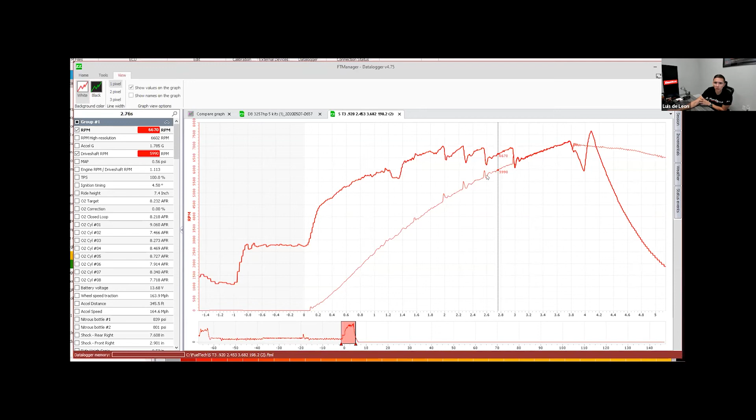I see it. Okay, so this is the data logger side of the system. As many people can see, the background is black. I'm going to show how to change it to white, because the other day a lot of people asked me. It's pretty simple, depends on how you want to do it - white or black. I'm going to keep it in black, I think the contrast is a little bit better. This is actually a run of my car back in the day when we were doing Radial vs The World.

If you see, this vehicle does not look much like a nitrous car. The motor goes uphill and you barely can see the kits coming in, but look how interesting - the car does a dive on the motor right in the middle. And you can look at the timing - it went down to -10 because it was pulling a wheelie. Since it's a radial car, there was no ride height on the car, and you can see the front end of the vehicle was going uphill, steady going uphill. The unit sensed it and took power away to bring the nose back down, so the driver didn't have to feather the throttle.

So number one, it takes the chance of flipping the car backwards and crashing pretty low. Number two, the driver is never going to be as quick as electronics. So instead of the driver trying to pedal the car, the driver, in this case me, could stay at 100% TPS throughout the run, but the ECU manipulated the power so the front end could go back down and make the pass. On this particular run, the car went 0.920 to the 60 foot, 245 to the 330, and 368 at 198 to the eighth mile.

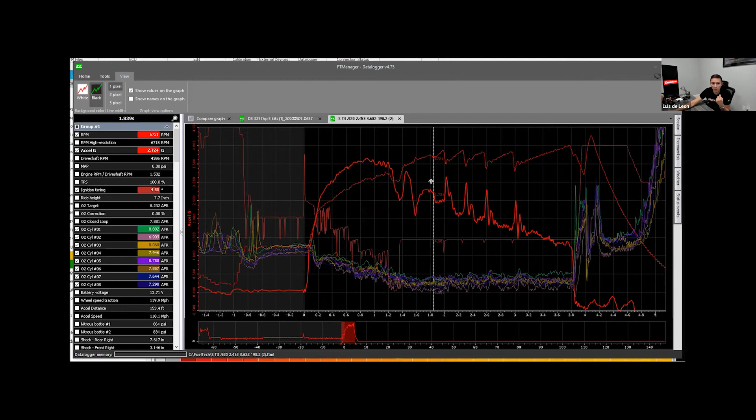Also, it has individual O2 sensors, as you can see, so every single cylinder has a different O2 reading. It has a built-in G meter where you can see the G meter of the car. You can see where it shattered the tire a little, and then it slowed down during the wheelie because it stopped the tire to come back, and then it went back at it. It's a 5-speed transmission, and the transmission is manipulated by the ECU. So all channels are recorded - everything that's in and off is recorded. This is the nitrous kits kicking in - you can see where boom, boom, boom, boom, they go in.

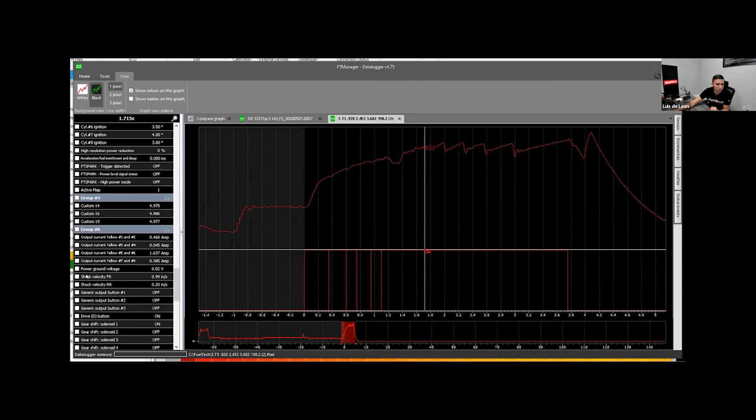Going back to the transmission, the ECU shows when it does the shifting. So there's no guessing anymore. Did my electronics try to shift? You can see the output going on and off, trying to shift. That thing will tell exactly what is going on.

And some of the outputs even measure current. You can make sure that when you trigger the output, the ECU sees the current draw, just like a power distribution module. Sometimes we talk about a PDM, but some of the stuff on the car, you actually wouldn't need a specific PDM because the ECU itself can provide enough juice for that.

So the transmission solenoids are connected straight to the ECU, and the ECU can check, as you can see right here. Once I shift it, you see the current change. So I can see that, yeah, my solenoid is connected to my transmission, is doing what the ECU is telling it to. This helps you tremendously when trying to diagnose a problem if it may happen. The problem happens, it will tell you. Something happened right here. You see there's no current on the solenoid for number 3 gear shifting.

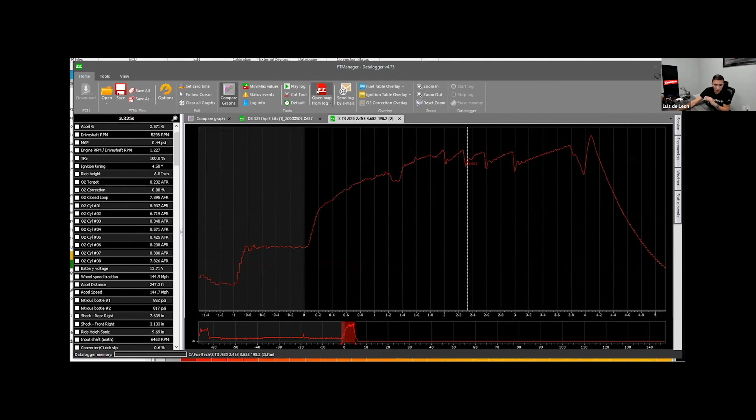Another really cool feature in the system, if you have a data log, the tune is attached to the log. So you can block it if you want, but it's a native feature they use. So okay, I made this run, 368 on radials. This is my drive shaft plot. I can straight see it was a little bit lazy here, a little bit fast there.

That's why you wheelie, so it was too fast here, a little bit slow here. That's fine, let me see what I had on the tune-up. So you can click on this button. And I think I don't have you guys... let me show. So I'm gonna do a new share, and I'm gonna share my FT Manager now.

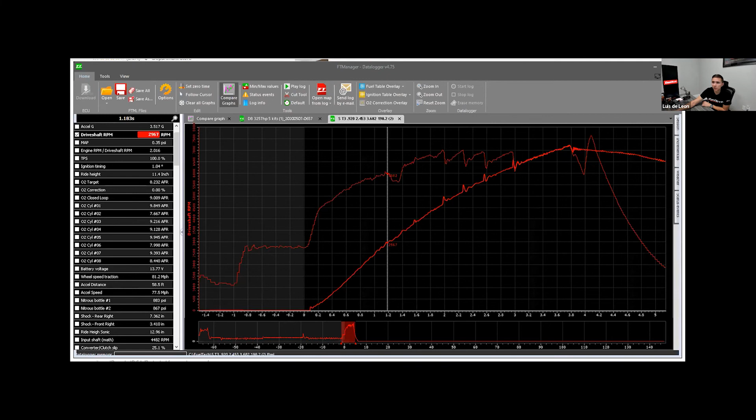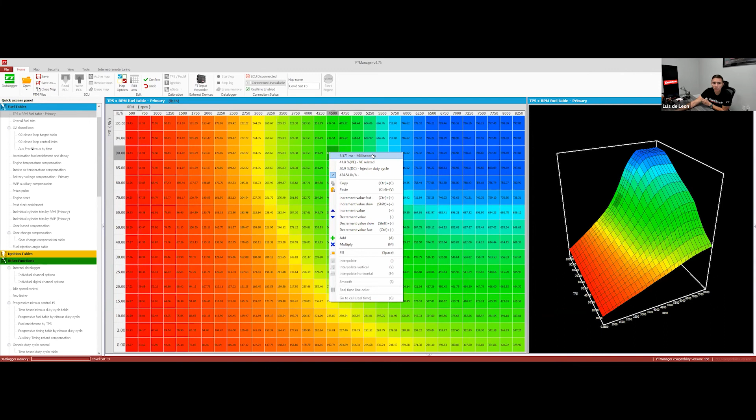So let me know if you can see that, different screen? Yes, yes. Okay, so on this different screen, this is my fuel base map that I had for that vehicle on that run. So I can see these are my fuel flow numbers right now, but I can easily swap between pulse width milliseconds, volumetric efficiency calculated, duty cycle of the injector, or fuel flow. They all correlate, so I can easily swap.

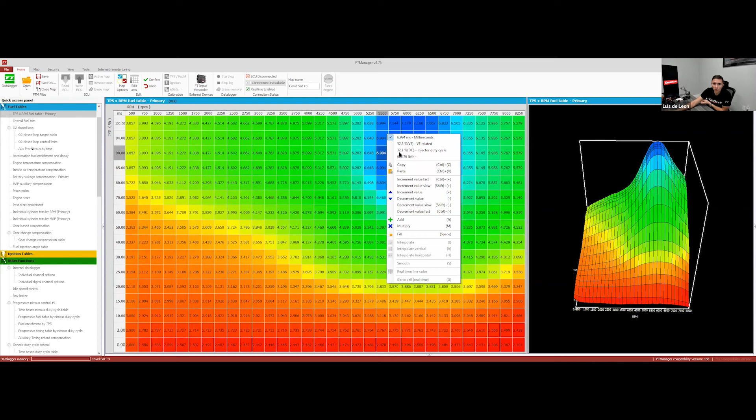Oh, this is my milliseconds. And I can observe my milliseconds are closer to my torque curve. Where my motor makes the most torque, I have the major amount of fuel per revolution. If I change to fuel flow, this is more like my power curve. So total fuel flow, not millisecond pulse width, but total fuel flow correlates to my total power.

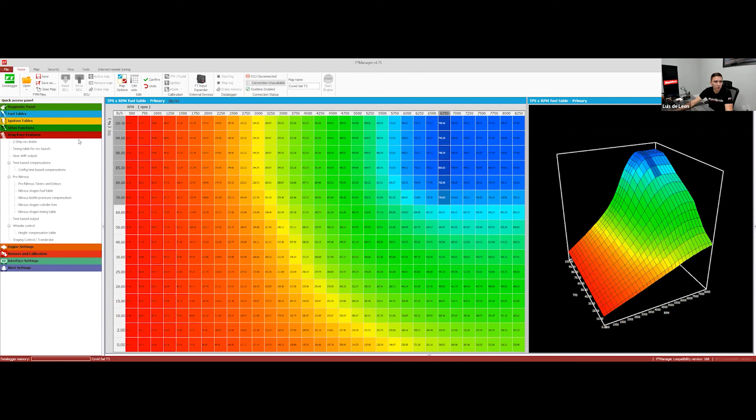On the left, it's what we call the quick access panel. Everything is organized in the system in sections. So if my tune is right and I want to work on my power management, I want to go quicker or slower, you can go to your drag race features, and then you can select inside what you want. So for example, it's a nitrous vehicle, let's go to the Pro Nitrous feature, timers and delays.

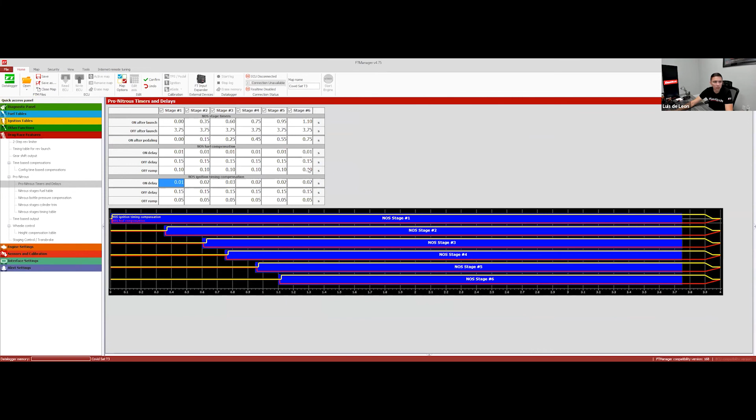And I can see when I turn them on, when I turn them off, delay for the fuel, delay for the timing, and a graphical representation of where they kick in along my run and where they kick off. Wheelie control, we saw it hit, right? So this is my timing table, height and time inside the run and how much timing I take off to keep the nose down.

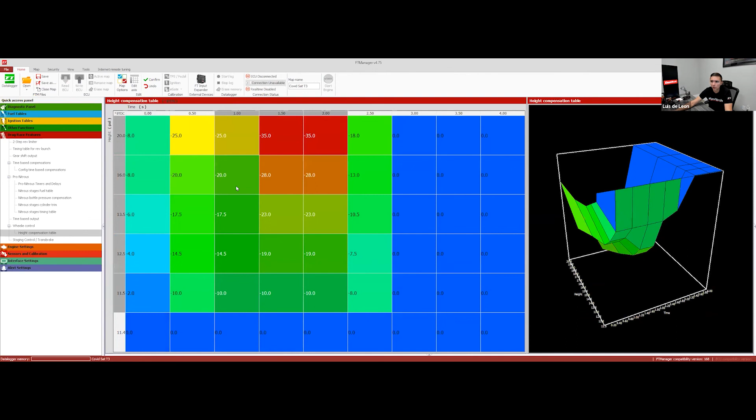Traction control, we call time-based compensations. This is my engine plot. This is my time-based fuel, I'm adding fuel down the track to keep the motor happy. This is my time-based timing, you're still doing some time-based timing to manipulate the power. And this is my drive shaft plot to keep the chassis in check going down the track.

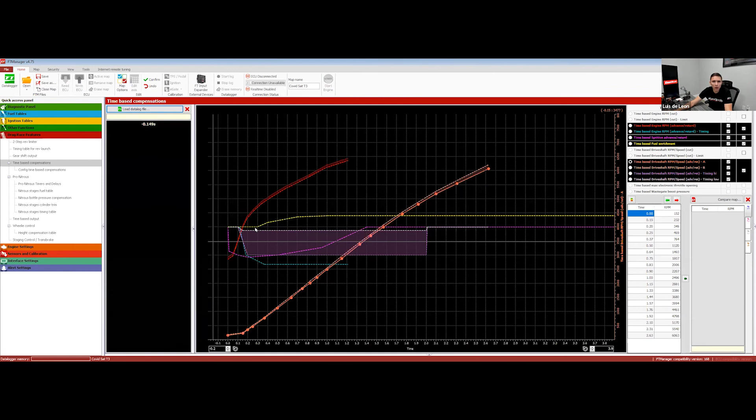And I can easily pull up that run and compare it with what I have on my power manipulation setup. So I'm just picking it up and now it shows up. As you guys can see, this is, I changed the color really quick to make it easier, green.

This is my engine plot, and you can see on the red line, this is what the ECU would not allow the car to do. It would go up to the line and stop. And if you look at my drive shaft plot, it's the same way. It was trying to go towards the plot, and once it hit it, the unit would take timing away, and that's what you're seeing in these numbers.

The timing going up and down like crazy, it's on thousandths of a second, taking power away and turning back on per cylinder, going down the track in a way that no human being could do, unless you previously figured it out while standing still inside your trailer, trying to think what we're gonna do down the track. So you plot what you want, and the ECU in real time will manipulate things to make the car run the number you ask for.

The concept for EPART Trade is basically, in my opinion, there's a big hole in the internet. The internet started many years ago, but there's never been an online business community for racers on the World Wide Web. The need for EPART Trade is actually quite obvious. Basically, people in the business of auto racing need a place online to hang out and get their problems solved. It's extremely simple for a buyer or for a supplier to interact on the platform.

The first thing you need to do is sign in, which is free. The second thing is, when you see a product you're interested in, all you need to do is click on request more information. If it's a company, you click on request more information, and from there it is forwarded directly to the buyer or to the supplier. You can go to EPARTRADE.com, become part of a community of businesses in racing, and it makes sourcing products much easier than just using the internet or Google.

At EPART Trade, there is no e-commerce. It's literally a connection, just like at a trade show. So now, any time of the year, a buyer could reach out to a supplier through an email. More than that, it's a place to go just to keep current every day. It's a good place to start your workday in your racing business or in the offices of your professional race team, and you know you're current when it comes to new technology, industry news, technical papers, technical videos, and more.

We're not looking for a million hits per day. All we want is people who are really the volume buyers of racing products in the racing industry to be part of the little world of EPART Trade. We have racing businesses participating from around the world, so you get suppliers and buyers from around the world. EPART Trade really eliminates having to travel or close down your shop. Now you have a place to showcase your racing product and technology globally.